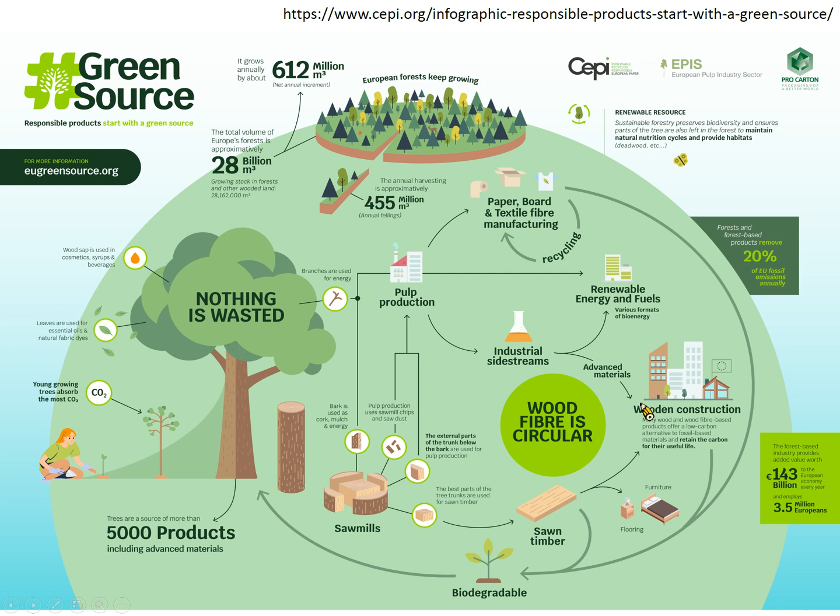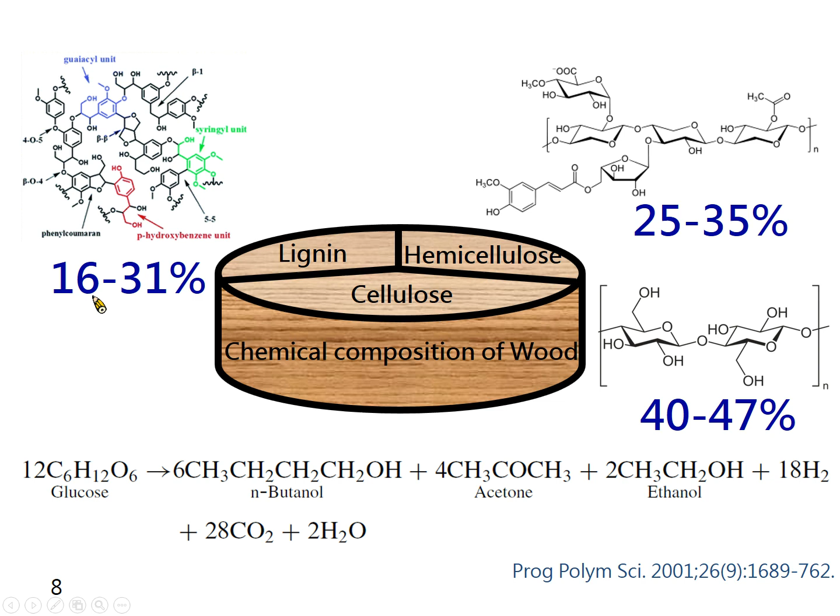The main wood components are cellulose, hemicellulose, and lignin. The percentage of cellulose is 40 to 47. The hemicellulose is about 25. Then, as you can see, is lignin, which has an aromatic structure. The percentage of lignin is about 16 to 31.

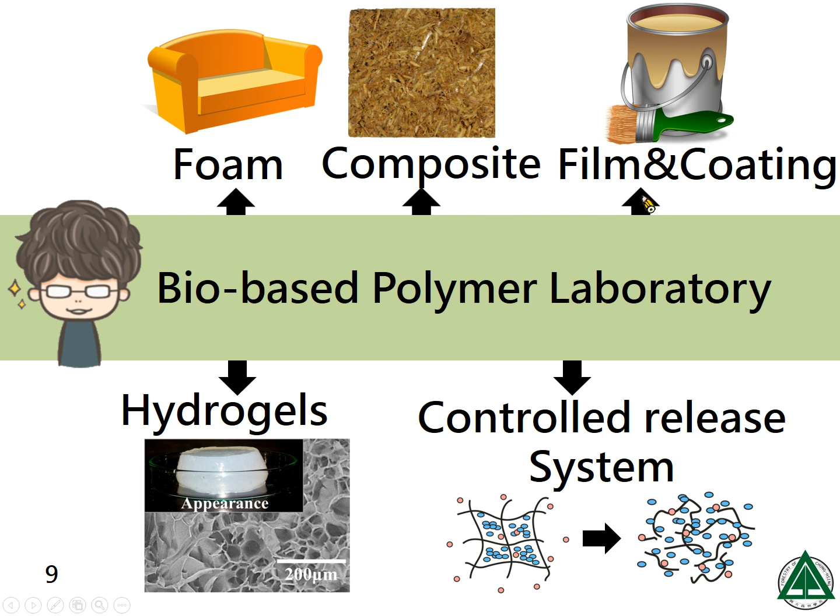My major is using bio-based materials to synthesize eco-friendly polymers, for example, hydrogel, polyurethane, phenolic resin, and nanoparticles. They can be controlled release systems, foams, composites, films, and coatings. It depends on the product we synthesize.

Woody material is solid, I think everybody already knows. How can we use natural resources smartly? We can use liquefaction technology to transform wood into liquid, and we can use it like chemicals. We also use plant oil, and maybe we can modify it to synthesize more products. We can synthesize phenol formaldehyde resin and polyurethane resin, and manufacture some green products.

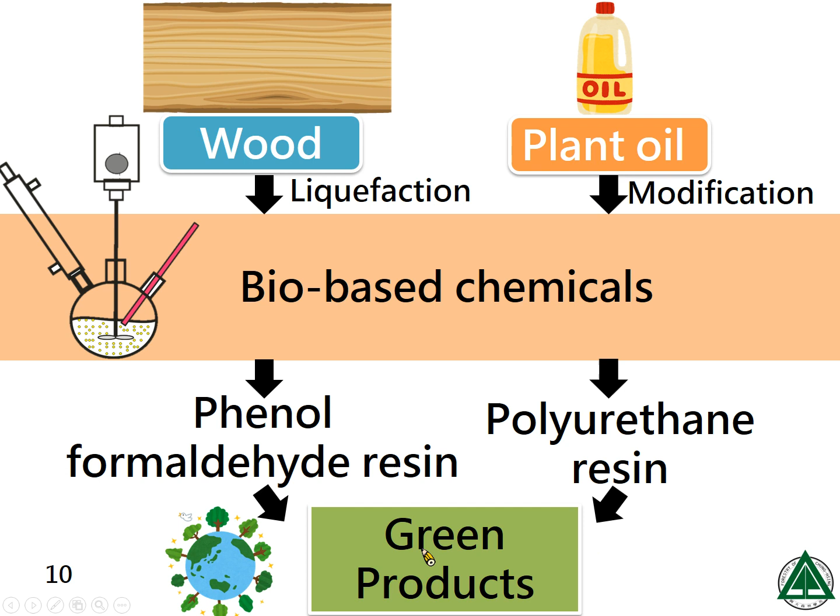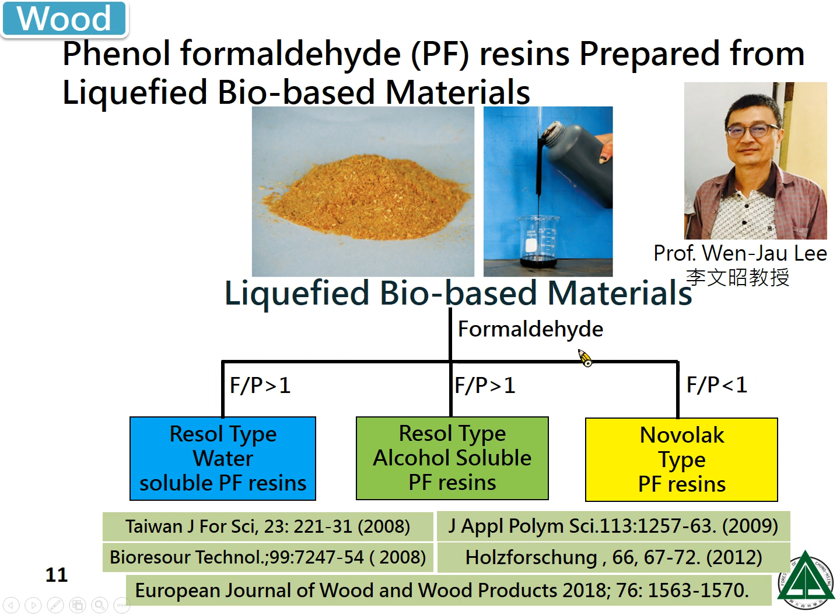I learned liquefaction technology and polymer knowledge from Professor Wen-Jau Lee. We can use liquefied products to synthesize phenol formaldehyde resin. Originally, wood or woody material is solid, so we transform it into a liquid, as you can see. Then we add some formaldehyde, control the ratio, and get resin. The structure is aromatic, similar to phenol, so we can add formaldehyde and get the resin.

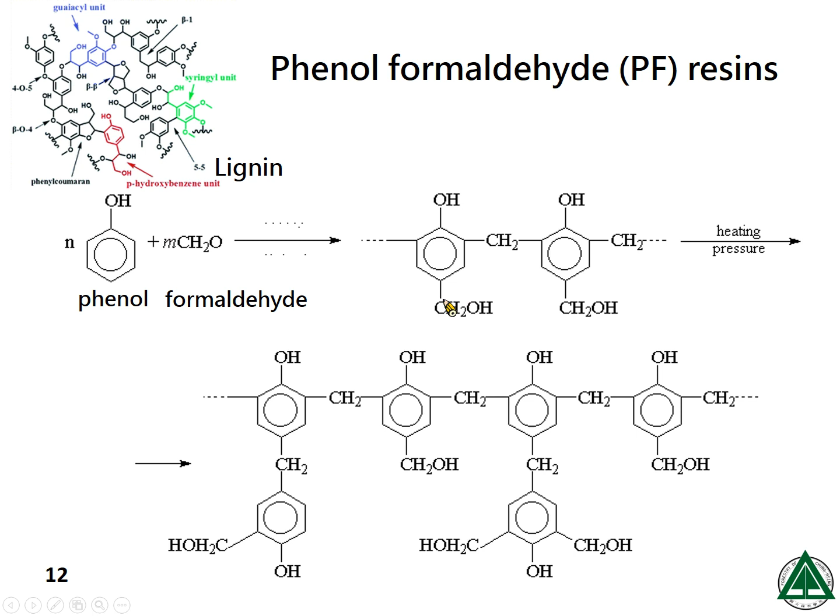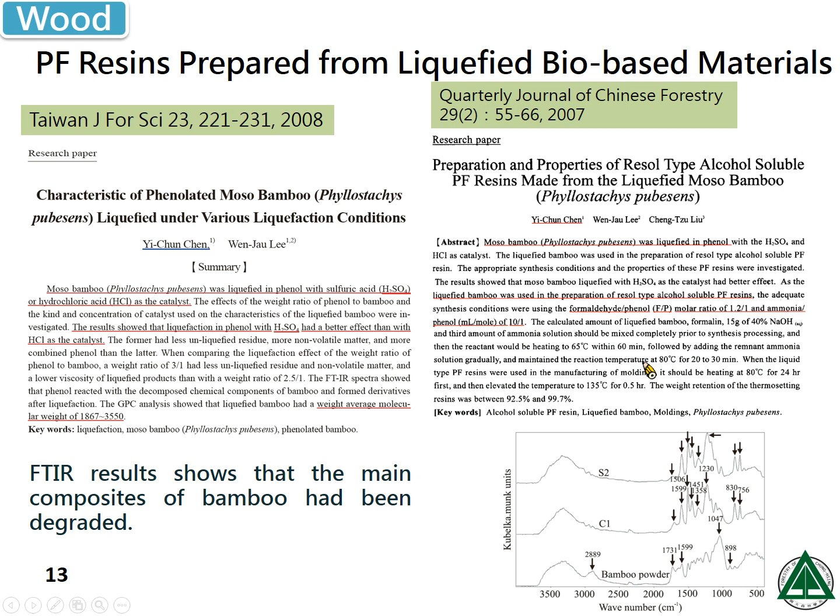First, we use Moso bamboo. It's very common in Taiwan. Moso bamboo can be liquefied. The FTIR result shows the chemical components decomposed after liquefaction. The main components have been degraded, so we can use it to synthesize resol-type alcohol-soluble phenol formaldehyde resin. We checked the properties, and we can use it.

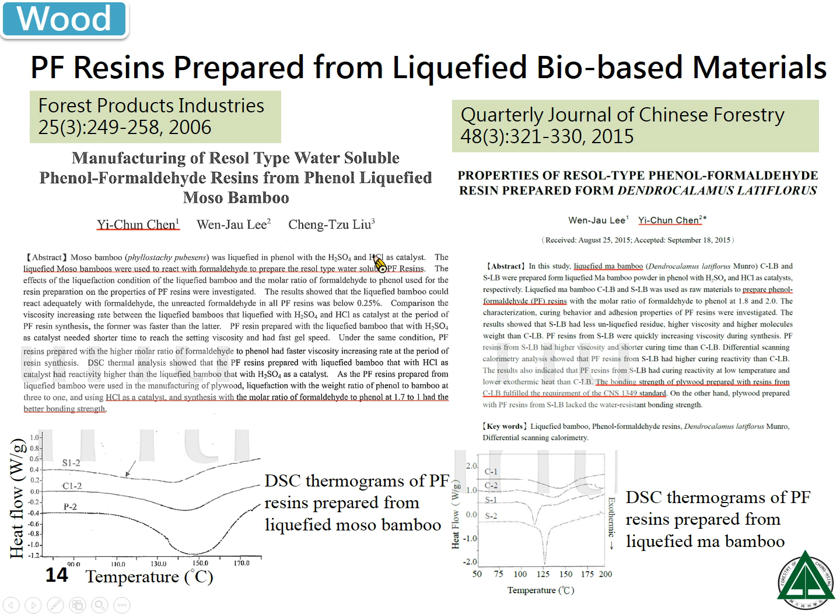I think everybody knows bamboo is very common in Asia, and it grows very quickly, so we also synthesized resol-type water-soluble PF resin from liquefied bamboo. Maybe in the near future, we can use liquefied bamboo as a kind of chemical. We also synthesized resol-type water-soluble PF resin from liquefied wood.

I think everybody already knows our main product from the forest is wood. When we cut the wood, we prepare timber. Then we have a lot of wood residue, and we can use the residue for liquefied wood. It's a very good chemical.

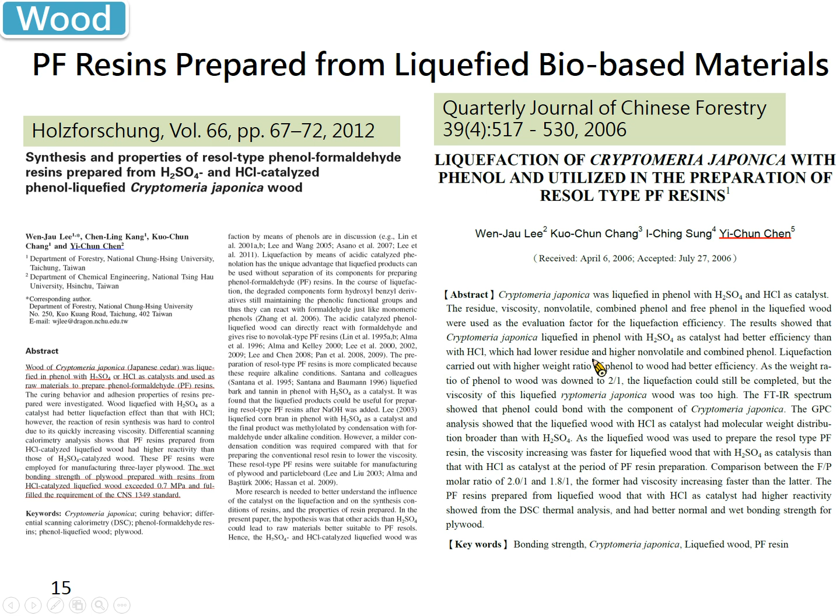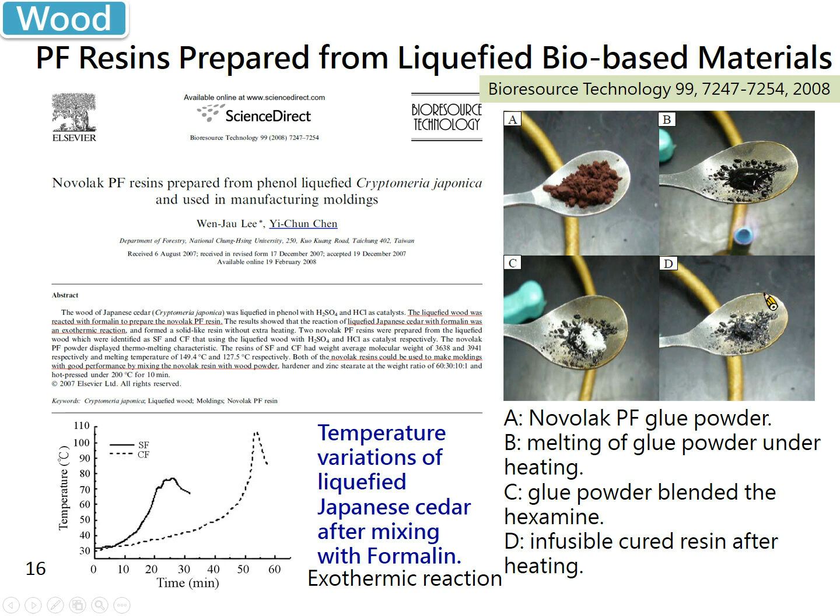The traditional way to synthesize novolac PF resin needs some equipment, and it wastes a lot of energy for heating. So we thought about how to deal with it. When we mix liquefied wood and formaldehyde, it's an exothermic reaction, so it's already reacted. The product is solid, so we grind it and get a crude powder. Then we heat it and it melts. When it's melting, we mix in a cross-linker, for example, hexamine. Then it becomes solid resin. We successfully prepared it.

The powder can be used for moldings. In the traditional way, the properties are not really good. Then we changed to use the powder. The novolac powder makes moldings with low water absorption and good dimensional stability.

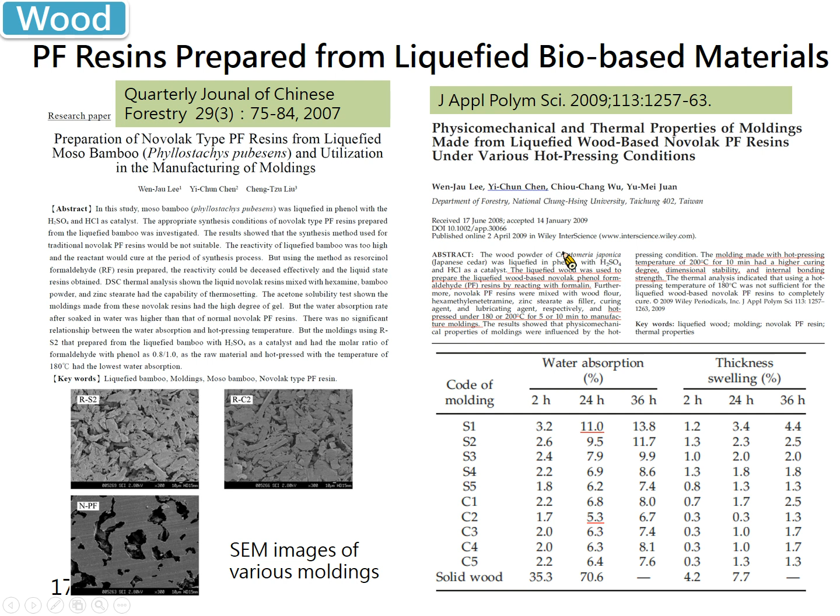The bio-based molding also shows pretty good thermal stability. I think it's better than wood and some traditional materials. It's similar to traditional PF resins.

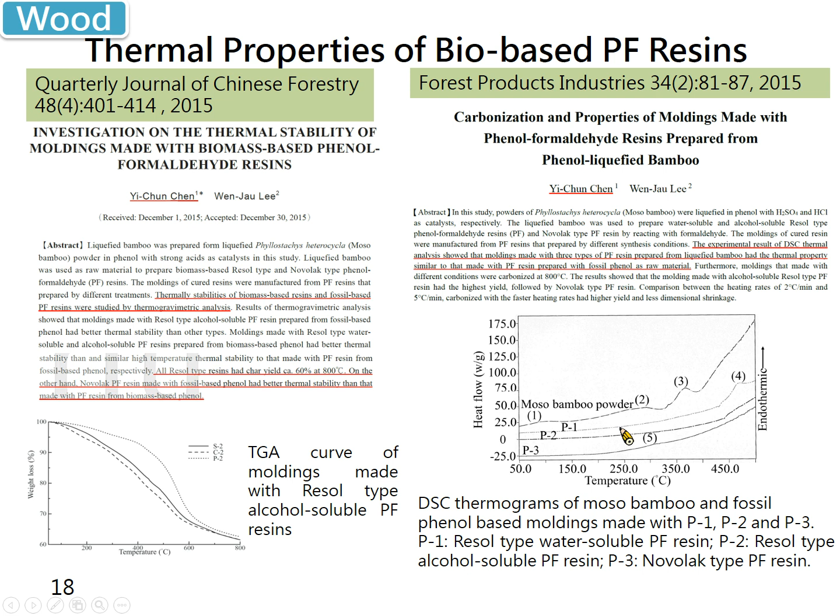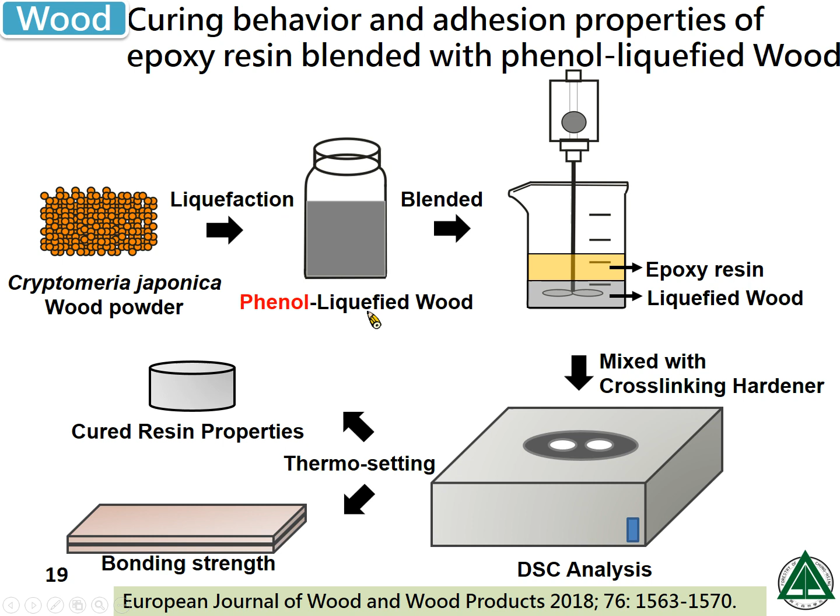We also think about what kind of application we can use. Epoxy resin is a high-cost product, so we try to mix it with liquefied wood. The result shows liquefied wood can replace epoxy resin, with really good curing property and bonding strength.

On the other hand, we would like to use bio-based materials for other polymers, for example, polyurethane. Polyurethanes are made from diol or triol and diisocyanate or triisocyanate monomers. The isocyanate component contains the functional group NCO. The NCO can react with amine, water, alcohol, COOH, or urea. After the reaction, it leads to formation of the urethane linkage.

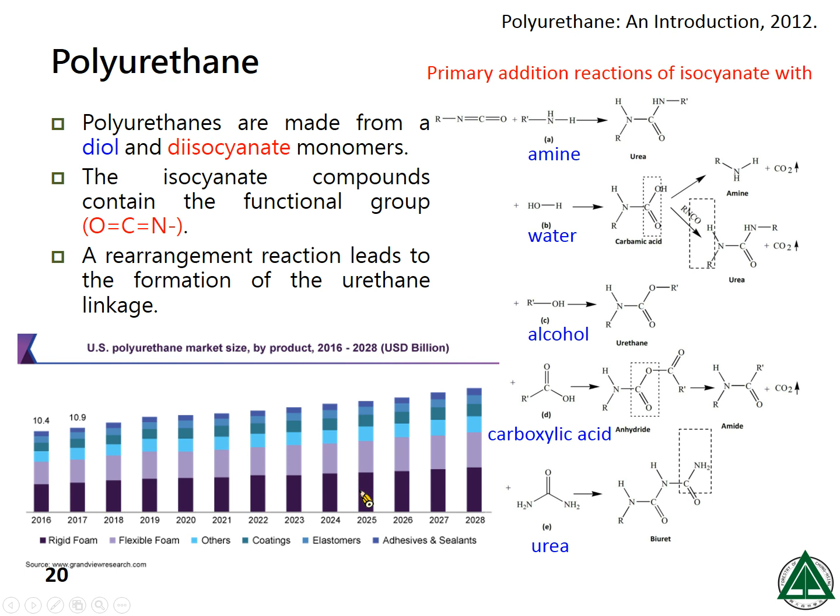Moreover, as you can see in this figure, the US polyurethane market size keeps growing. So in the near future we will need polyurethane more. We use polyethylene glycol and glycerol as co-solvents to liquefy wood-based materials, for example, rice husk. So why do we use rice husk? The rice husk contains some silica.

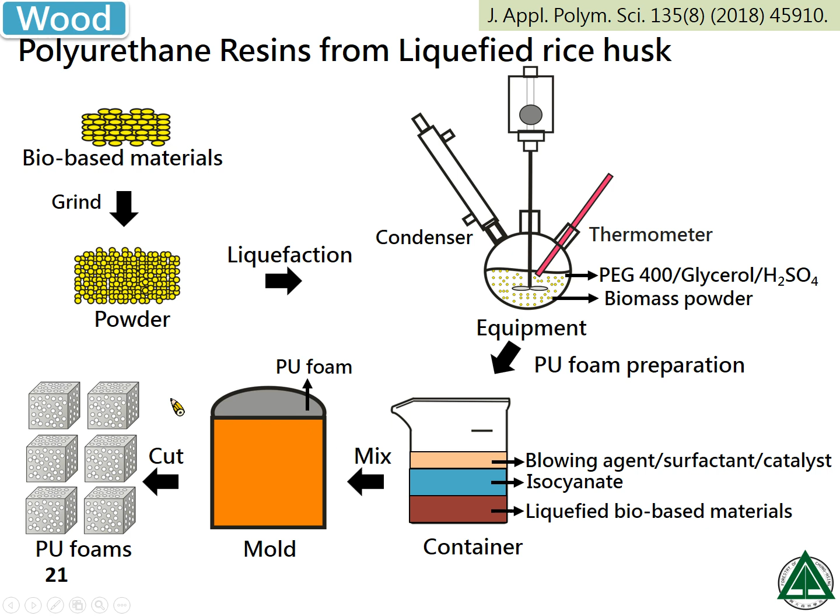Moreover, we want to prepare polyurethane foam. So we add some blowing agent, surfactant, catalyst, and isocyanate and mix it, and we can get polyurethane foam and cut it. We can get the product.

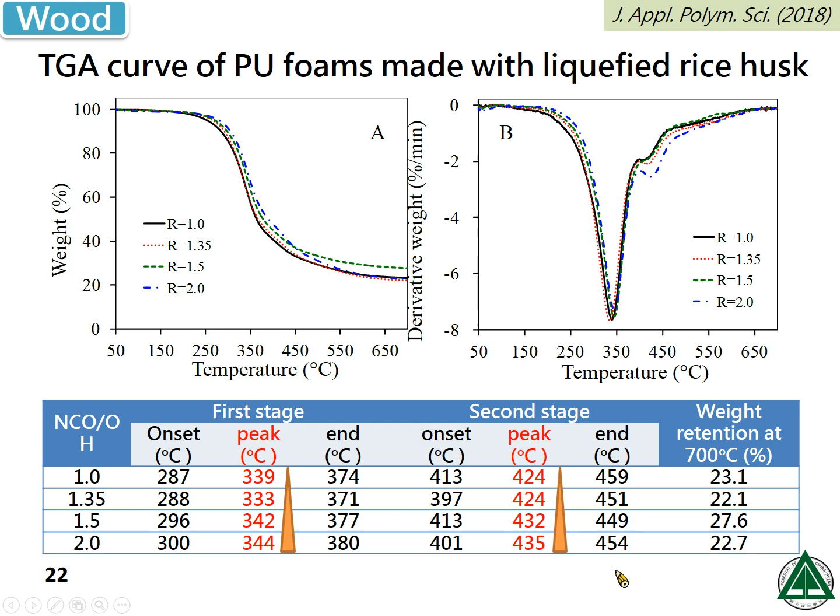We use the TGA curve to check the thermal property. As you can see, increasing the NCO ratio and using liquefied rice husk can increase the thermal property. So maybe next time we can use some silica materials or just use liquefied rice husk. Then we can increase the thermal property.

Organic solvent is dangerous and toxic. We can use liquefied lignin to synthesize waterborne polyurethane, so the solvent is water, which is really safe. Moreover, we compare two kinds of chain extender. The first one is 1,4-butanediol, and the other one is ethylenediamine. So two kinds of chain extender and two kinds of polyol: one is PTMG, and the second is liquefied lignin.

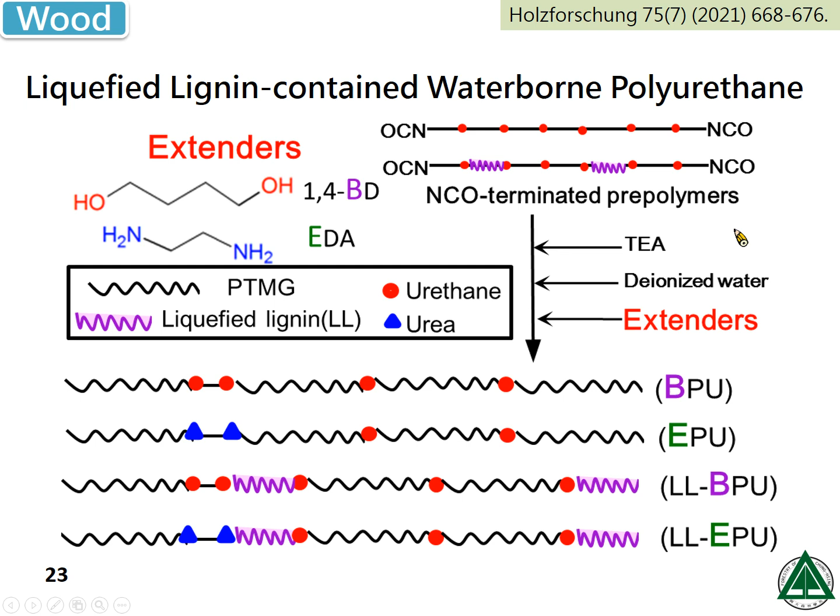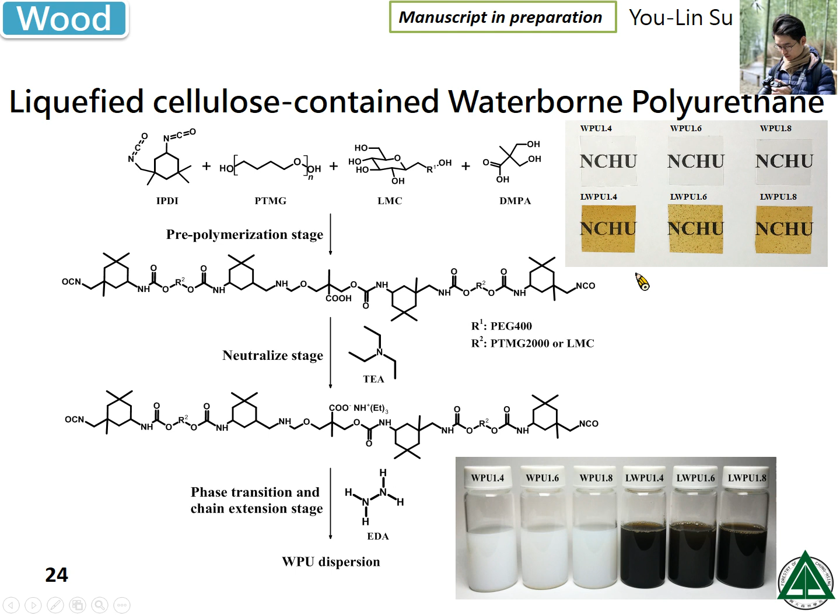We think we can synthesize a new type of waterborne polyurethane that contains some lignin. The result shows the lignin and chain extender can change the property. Moreover, we also use liquefied cellulose to synthesize waterborne polyurethane. The result shows liquefied cellulose's structure is different from PTMG, so it can control the property of waterborne polyurethane. Especially, we can increase the hard segment ratio.

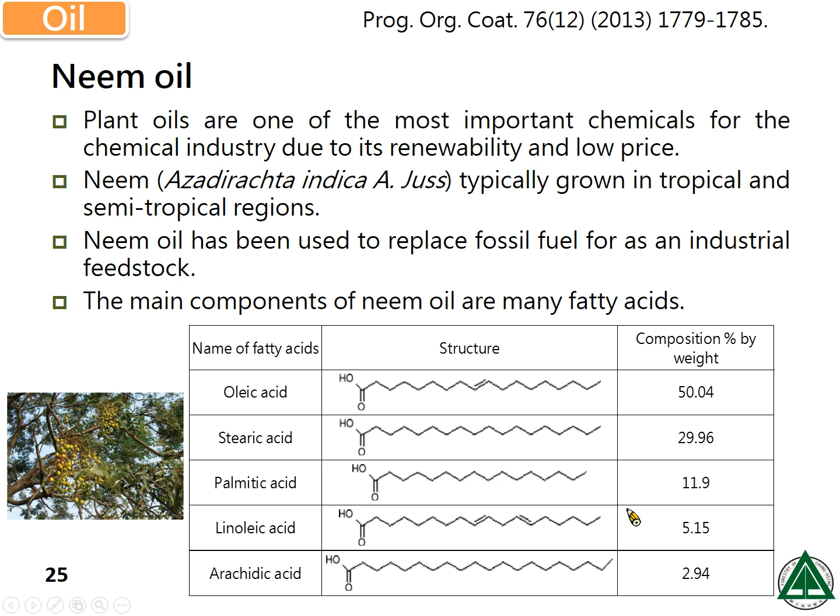Plant oils are one of the most important chemicals for the chemical industry due to being renewable and low price. Neem typically grows in tropical and semi-tropical regions. Neem oil has been used to replace fossil-based materials as industry feedstock. The main components of neem oil are fatty acids. So as you can see, these are the main components. Azadirachtin can be extracted from the neem tree.

The chemical has great potential as a biocide for antibacterial use and pest management. So we think maybe we can synthesize it, but actually it takes many steps and the price is still high. So maybe we cannot easily use it directly, but it's already contained in neem oil. So maybe we can use it for some antibacterial property.

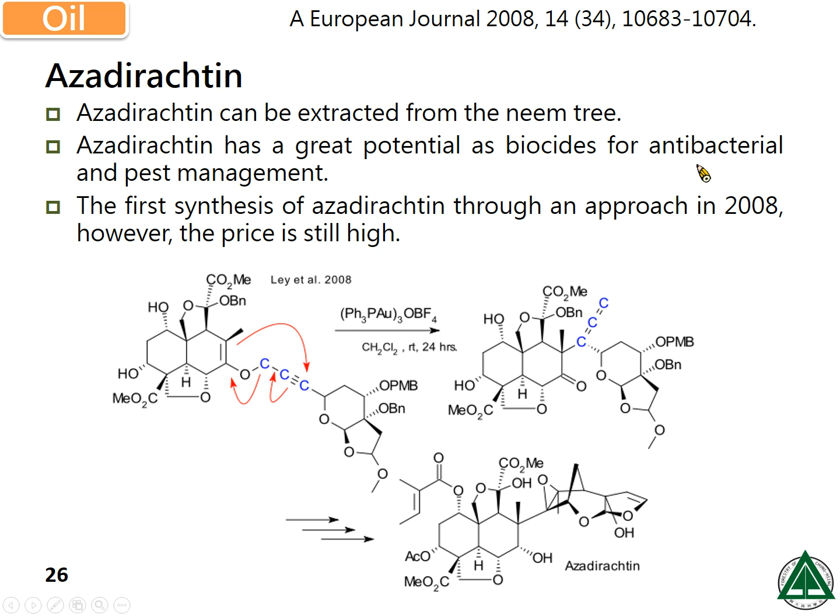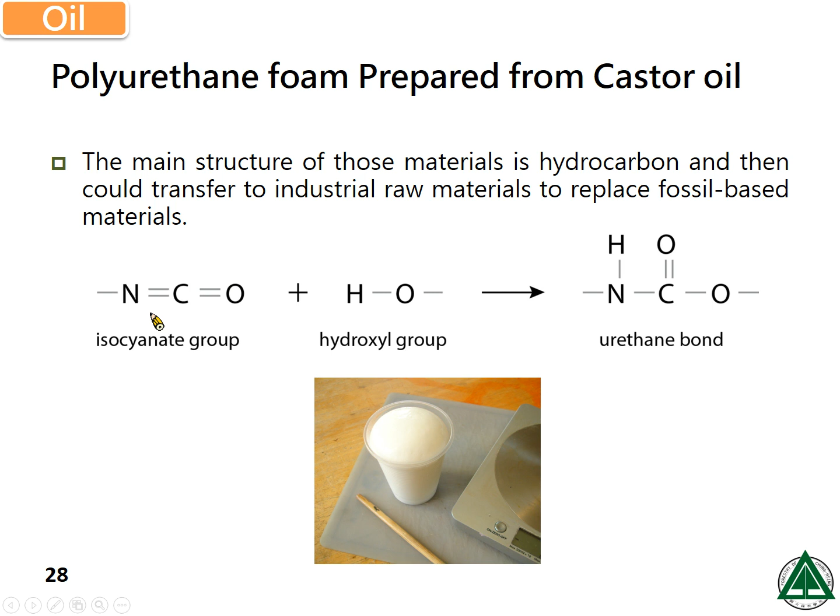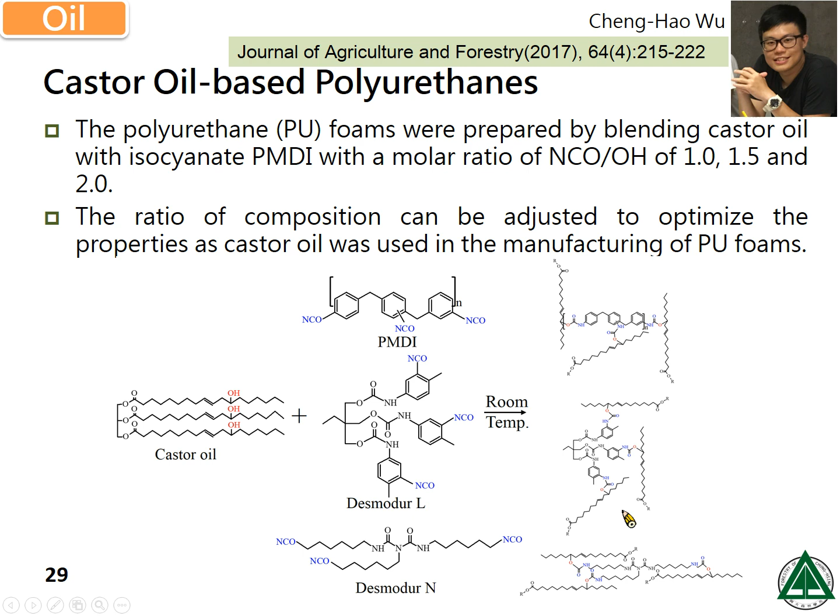So polyurethane foam can be prepared from castor oil directly because it already contains some hydroxyl groups, so it can react with isocyanate and form the urethane bond. So my students did some research about it. They prepared polyurethane foam from three kinds of isocyanate and compared the properties.

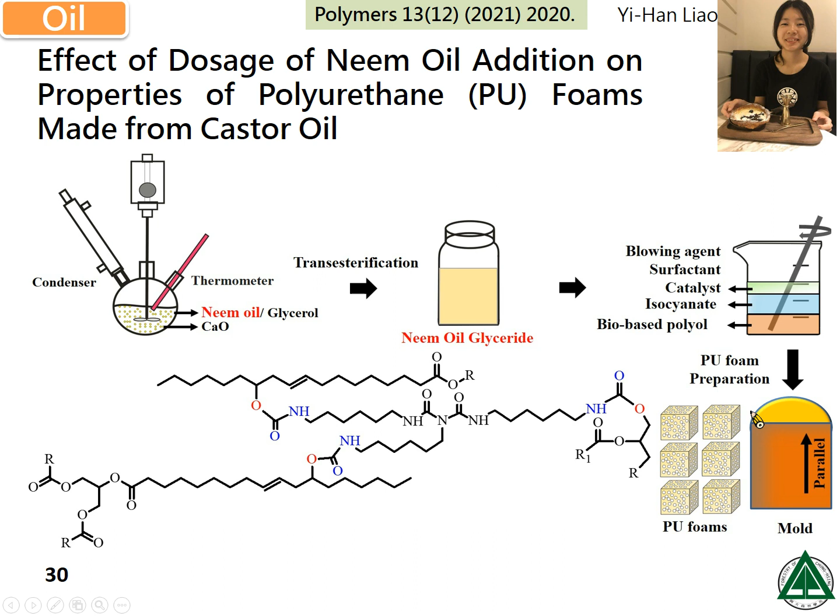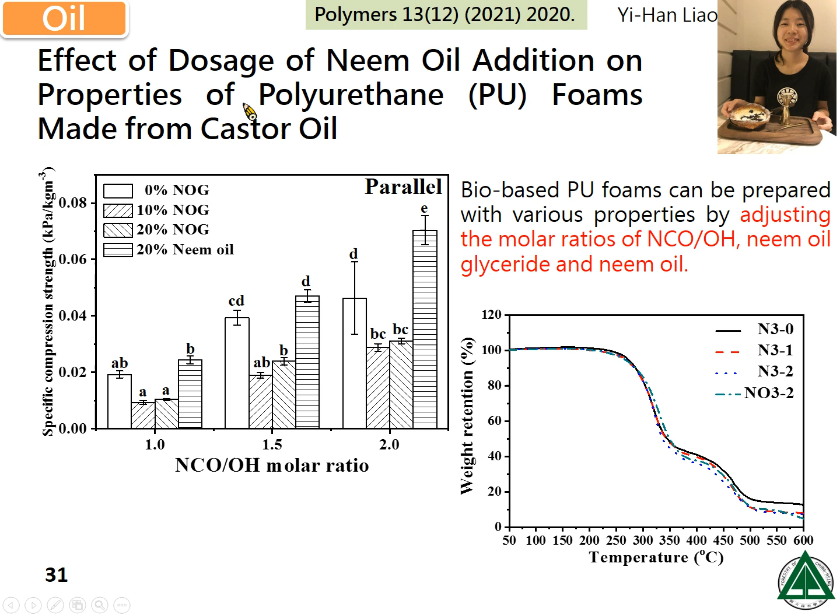Neem oil and its glyceride can modify the properties of castor oil-based polyurethane foam. So we can use transesterification to get the glyceride. Then we mix different ratios of these chemicals, get the PU foam, and check the property. The results indicate when we mix neem oil and the glyceride, we can improve the polyurethane foam property. Then we can optimize it.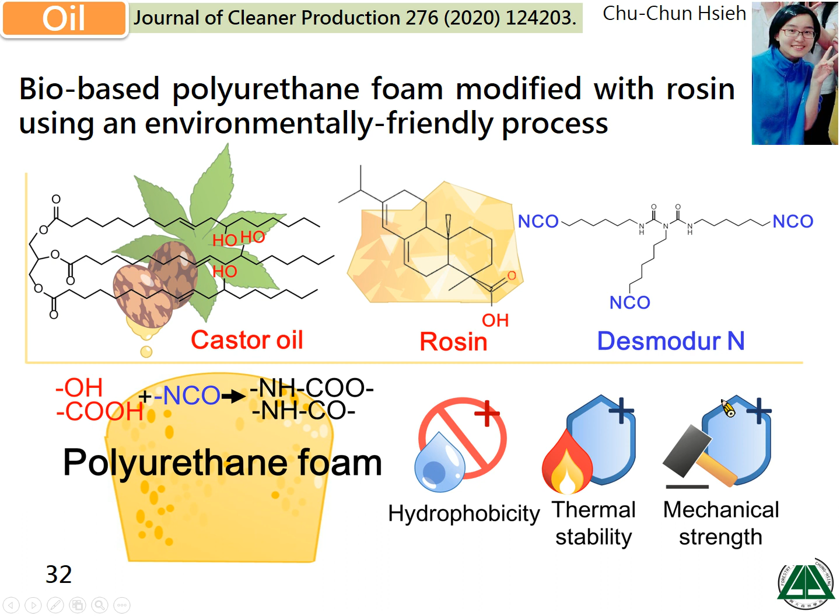We also use rosin to improve properties of castor oil-based polyurethane foam. I think the structure, as you can imagine, is really hydrophobic. Moreover, maybe it can increase the thermal or mechanical properties. These results demonstrate the bio-based polyurethane foams are improved by adding only 2 to 4% rosin. We can produce foam with excellent mechanical and chemical properties, and we can control the water absorption and thermal stability.

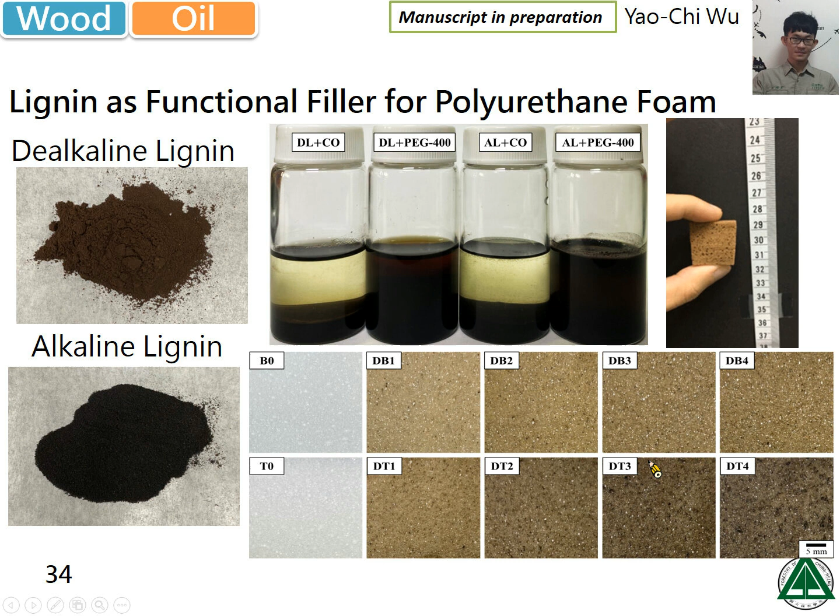Lignin also can be used as a functional filler to prepare polyurethane foam. Moreover, as lignin can increase the bio content, we can get homogeneous foam with flexible property. We can use it for some cushioning products. The castor oil-based polyurethane can be used as adhesive. So with the adhesive, we can manufacture some composites. We also use 3 kinds of isocyanate to prepare it and compare it.

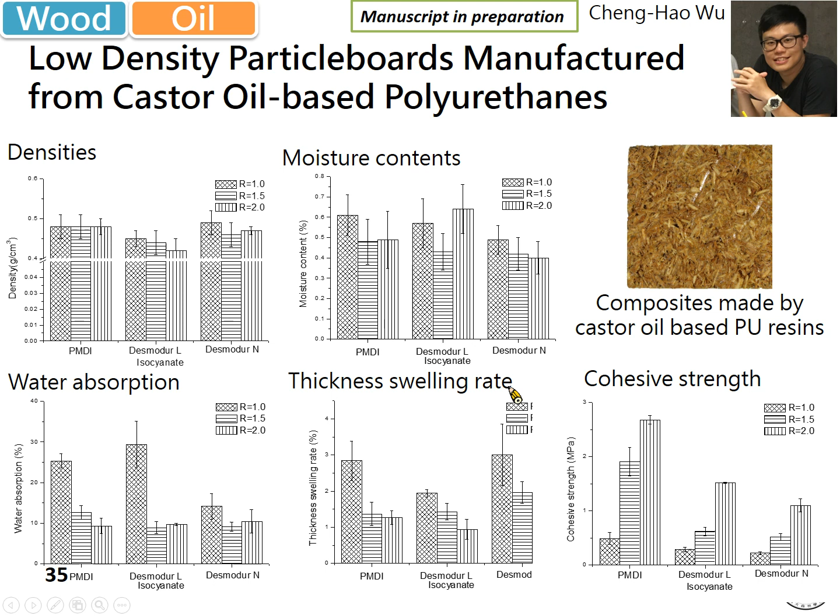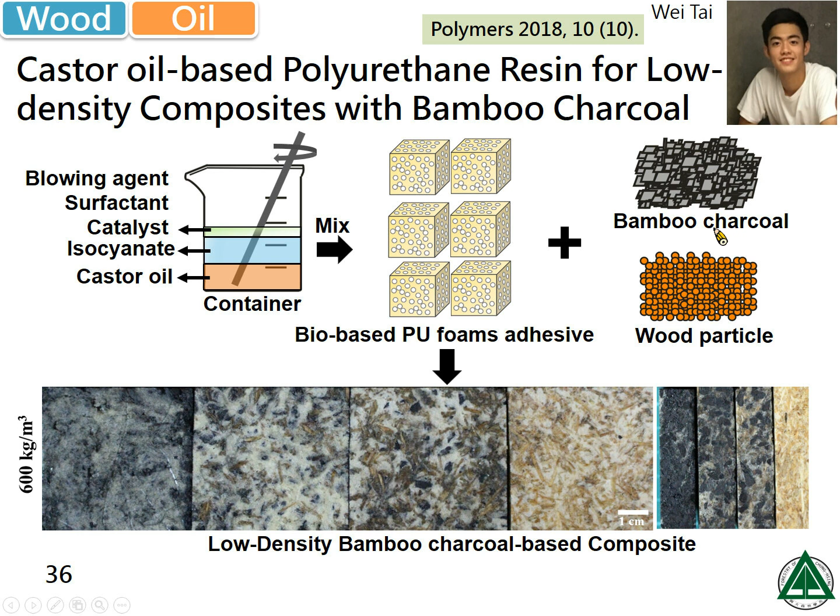We also use bamboo charcoal to prepare composites. The composites have excellent dimensional stability. The result shows the bio-based polyurethane composites have high potential for use as eco-friendly building materials. Neem oil also can be used as a renewable chemical.

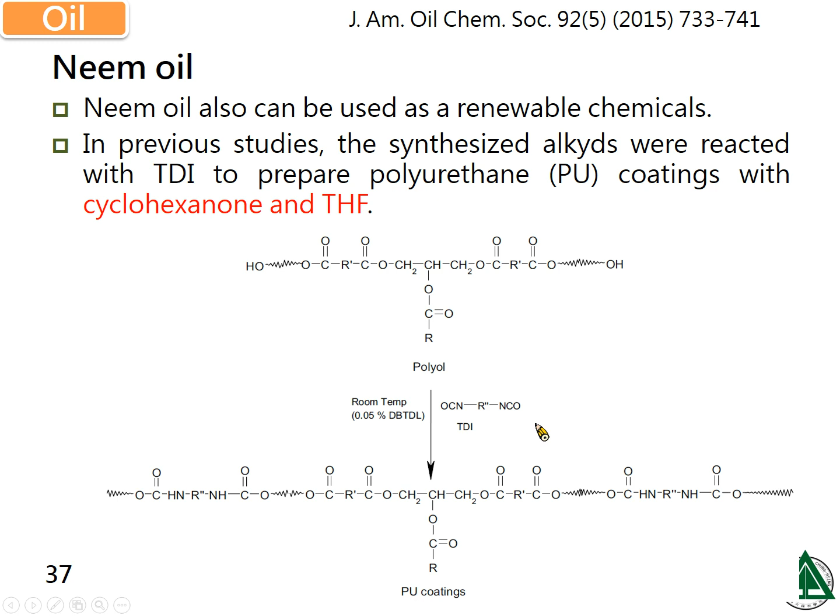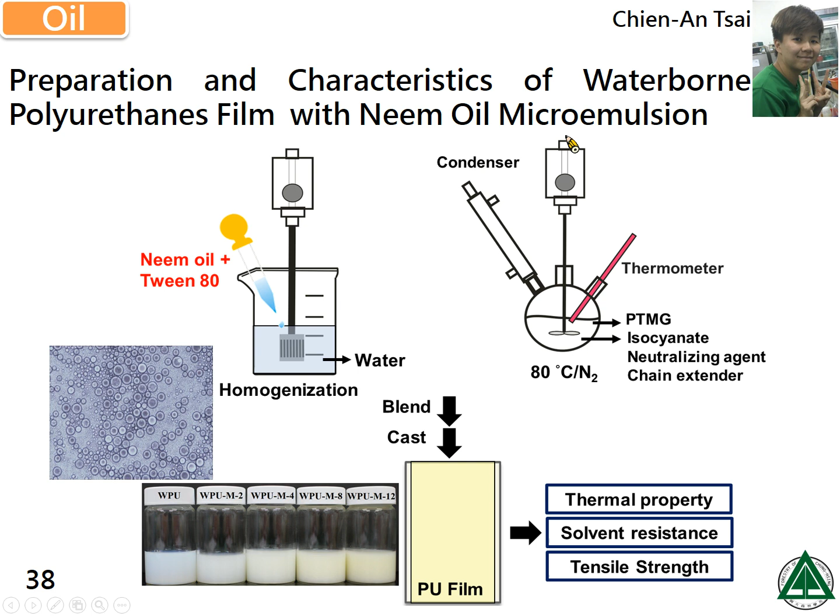In a previous study, synthesized alkyd was reacted with TDI to prepare polyurethane coating with cyclohexanone and THF. These 2 kinds of solvent are really dangerous and toxic, so maybe we can change it. We can use surfactant to suspend the neem oil in water, then the microemulsion is mixed with waterborne polyurethane to prepare the film, and we can check the property.

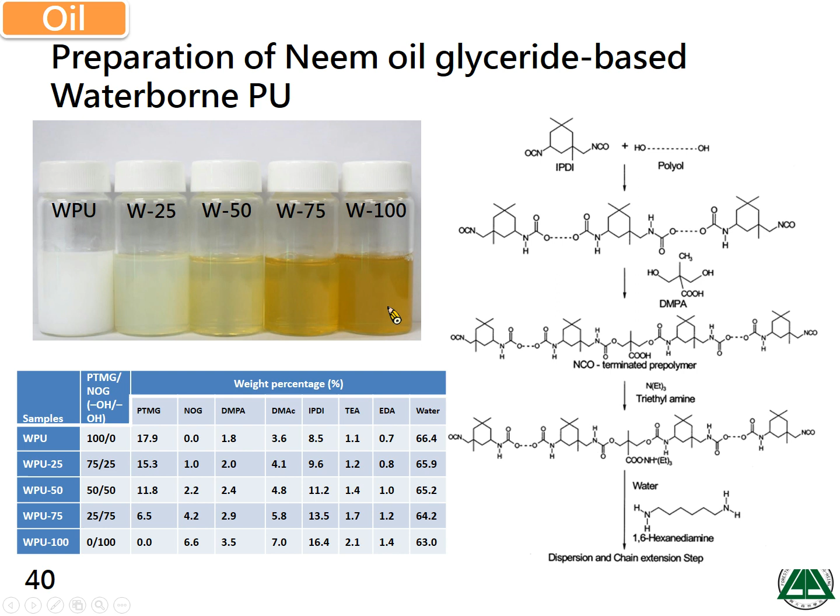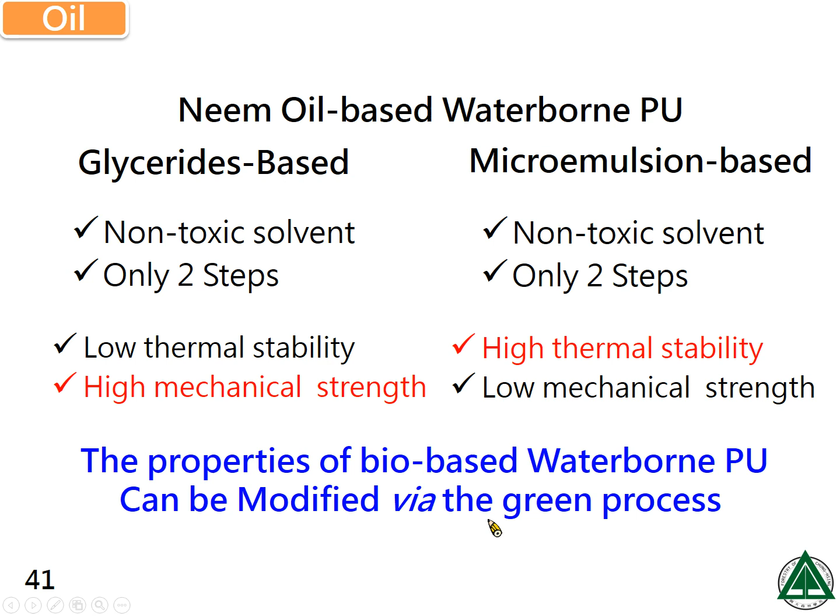We also use neem oil glyceride to synthesize waterborne polyurethane, then we check the properties. As you can see, we can synthesize waterborne polyurethane from neem oil glyceride at different ratios. When we add more neem oil glyceride, the color becomes yellow. So we can just use non-toxic solvent and only 2 steps, and then we can change the properties. And moreover, it is a green process.

Take-home message: maybe in the near future we can have green chemicals, and with our teamwork, we can have really successful products. Thank you very much for your kind attention.